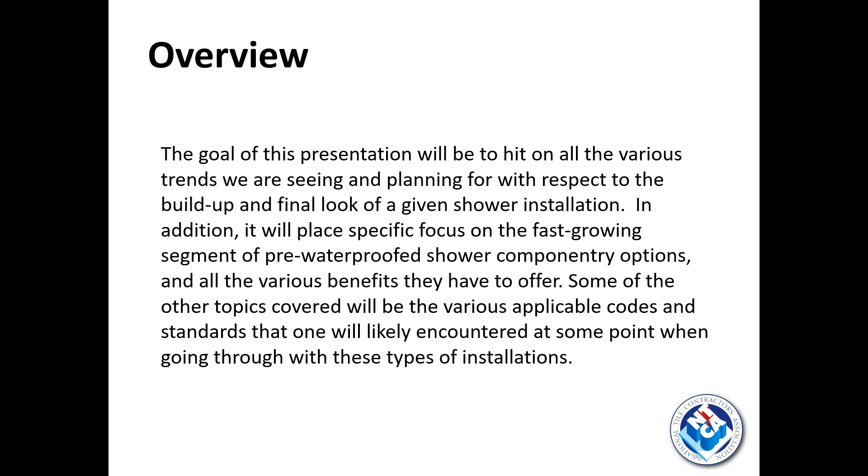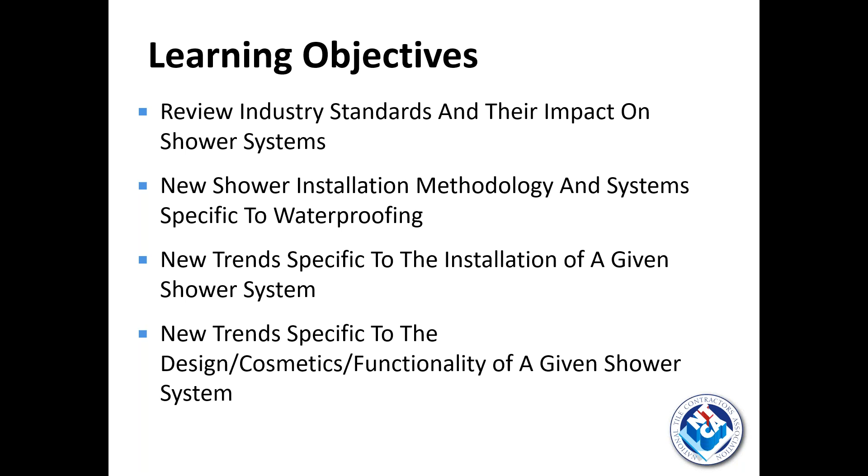So in addition to what Mr. Olson walked us through, some of the other topics I'm going to cover, in addition to the different pre-waterproofing options and some of the installation and design trends, we're going to cover the various applicable codes and standards that you will likely encounter at some point when going through these types of installations. When I think about laying out the learning objectives: a review of the industry standards and their impact on shower systems, new shower installation methodology and systems specific to waterproofing, new trends specific to the installation of a given shower system, and new trends specific to the design, cosmetics, and functionality of a given shower system. So a lot to cover. Hopefully we do it in a nice, concise way, and like I said, doors always open to hit upon any questions we get at the end of the presentation.

So when we think of tile and stone standards, the two major outfits that jump out in addition to the NTCA is the TCNA, which is the Tile Council of North America, and the ANSI, so that's American National Standard Institute.

TCNA provides a number of different installation methods for many applications, including showers and tubs. As I see it in my current seat, there are over 35 applicable different methods that fall within this arena.

The two major ANSI standards we're going to cover today are ANSI A118.10, which is a load-bearing, bonded, waterproofing membrane standard pertaining to tile and stone, and ANSI A118.12, which is a crack isolation standard for membranes as well.

A couple other codes to touch upon would be the IBC, the International Building Code, and the IPC, the International Plumbing Code.

When we get into some of the intricate different installations with regard to barrier-free showers, we're going to touch upon the ADA, the Americans with Disabilities Act, the ICC A117.1, which ties into the ADA, and the ASTM E96, which we'll touch upon when we talk about steam rooms and steam showers. It's a water vapor transmission test for perm rating.

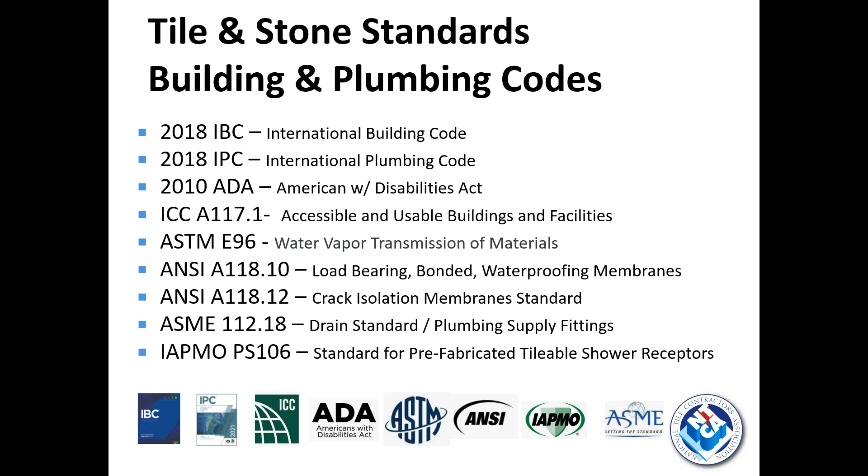Before we jump into the methods and trends in more detail, I want to provide some context around how the various methods are being digested and selected. From a product development standpoint, this involves outreach to you through surveys and on-job site interviews. I'm going to explain what we're seeing with regard to methodology selection and training.

And also the training around said methodology in this new post-COVID era. COVID-19 has impacted us in a lot of ways, right? There are social distancing guidelines, and that's really put a monkey wrench in the way we disseminated information—there was the trade show aspect, in-job interviews, live demos and training.

Now, in the beginning, before we opened up a little bit, we were hindered in that regard. A lot of the industry standards and a lot of companies and manufacturers have shifted to more online learning and training modules. As of March, roughly a third of both residential and commercial pros in a survey we took stated that their primary source of new product, method, and training came via online platforms.

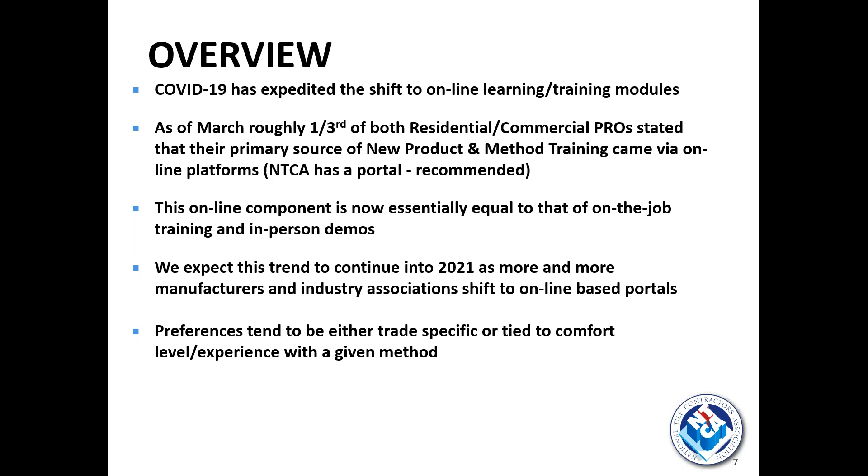Just to close that out, in addition to the NTCA portal, some manufacturers also have online learning portals as well. They are similar in nature to that of the NTCA, but they go into a little more detail with regard to the products as it's specific to that manufacturer's catalog. So it's supplemental information, but it's great information nonetheless.

Just to put a little bow around the selection and the learning process, when it comes to selection, it's very segmented. There seems to be a split between residential and commercial. There's a knowledge base that comes with it - you gravitate towards what you're familiar with. And then the third is time and cost.

Now that seems to be the one that really is the most flexible in getting somebody to specifically change from their given method of installation after they digest the information and learn about it a little bit more.

Between 25 and 33% surveyed are willing to try out a new given option based on their level of comfort after watching the video and understanding the various features and benefits associated with a given method.

When it comes to learning, we talked about the top three: on-the-job training, which is paramount, live demos, whether it be at a distributor or a job site level, and then e-learning, whether it's from an association and or a manufacturer.

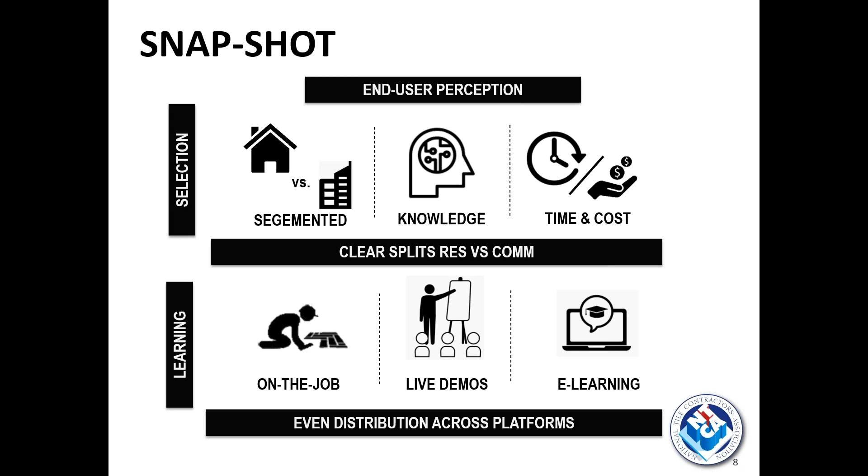Now we're going to move on to the specific installation methods and some of the installation trends that we touched upon earlier in the overview. In this section, I want to cover everything from shower types, waterproofing options for said showers, and also additional system tie-ins that are becoming more prevalent in the marketplace, whether requested by commercial entities and or end users themselves for their own personal consumption and use.

So the first one you're going to see is waterproofing. Now I chose to start off with waterproofing because when you think of it, it truly is the backbone of the support system for a given job. Without waterproofing, whatever's built up on top of it is essentially not going to get you the bang for your buck or meet the expectations that you're looking to get from said installation.

So an overview with regard to waterproofing. As of 2021, our research has shown there'll be likely a 50-50 split between traditional mud bed applications and pre-waterproof jobs. So when you think about mud beds, we're talking about that traditional installation, and pre-waterproofed, we're talking about anything from sheet to lightweight wallboard.

And I'll get into these in a little more detail as we get to the subsequent slides.

This is a trend that started a few years back, and we'll continue to skew towards the pre-waterproofed options. And we think there's a number of different reasons that I'll dive into in a little bit later that is causing that. Pre-waterproof solutions tend to be favored by the residential installation professional, but that balance is starting to shift as well.

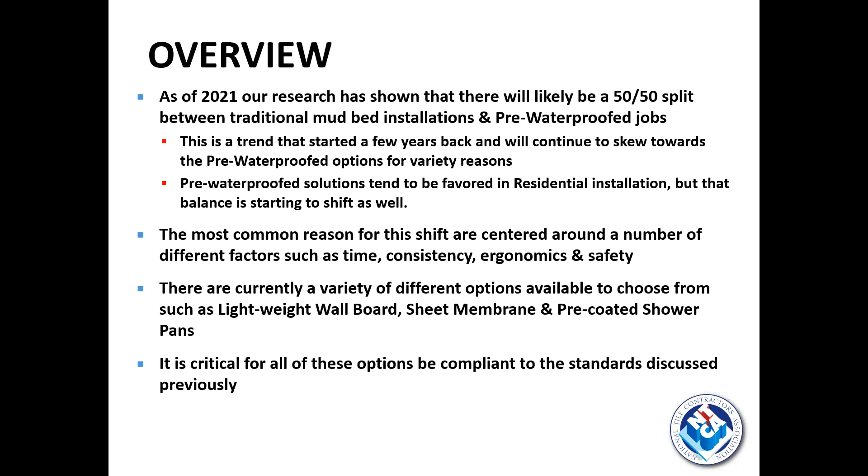So I chose, going through the TCNA handbook, the classic B415 type installation. This is a classic installation, good for large showers. It's a mud bed based application, allowing for a level of customization with regard to slope over distance. But at the same time, it can be considered bulky and thick. It has high impact in terms of stress on the body with regard to carrying materials, and also the amount of time it takes for the installation. It's tough when used with new design approaches, most notably barrier-free, which I'll touch upon a little later in the presentation.

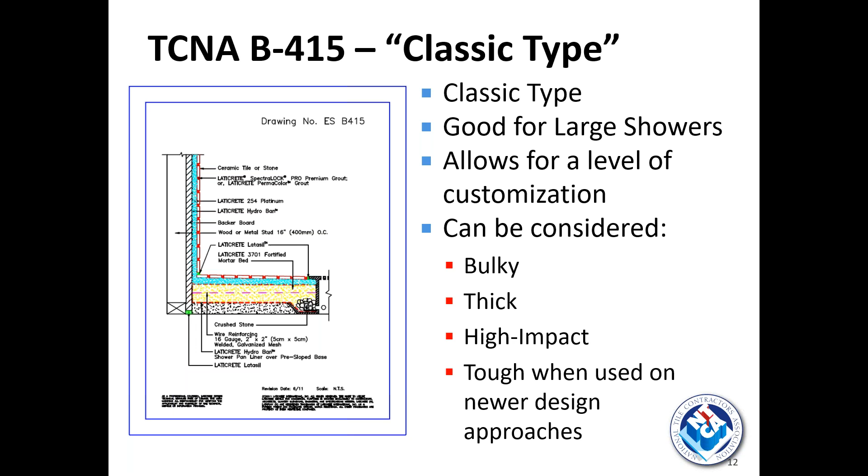Aside from mud bed applications, some of the waterproofing types I want to talk about are liquid applied, which can be both latex-based and cementitious-based. Pre-coated, pre-sloped pans, ready to slope, applied by thin set, ready to tile. Lightweight wallboard, which can be used in place of some cement backer boards. And sheet membrane, another option to be used on both the floor and wall for your waterproofing needs.

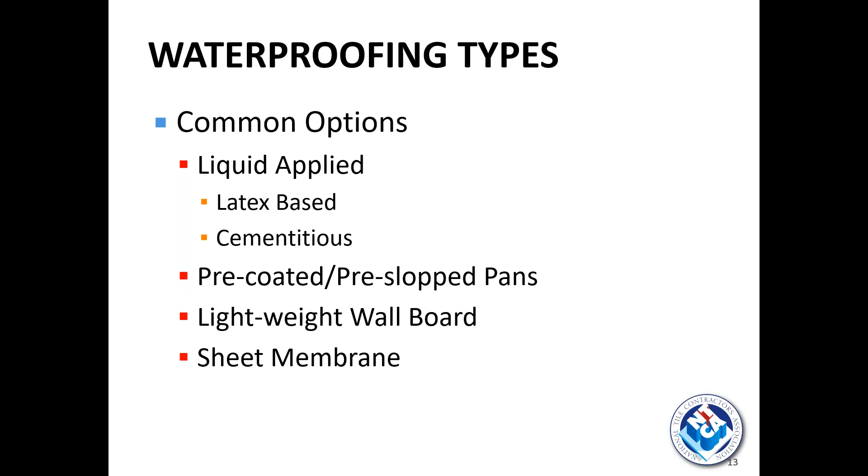When we think traditional liquid applied, some of the benefits are it's the most conventional, widely known method. It's most common on commercial sites, and in most cases falls in line with ANSI A118.10 and A118.12 compliance. Again, it's always best to check your data sheet to make sure a given material is in compliance and the testing is up to date. It's approved and recognized by a wide number of regulatory bodies, ICC, IAPMO, to name a few. It's easy to apply, there's no fabric required. There's a number of different ways to apply it: brush, roller, spray. It provides additional protection the more coatings you put on.

And then installation challenges: there is a bit of a time element and a margin of error in that two coats are needed. While it does provide that extra layer of protection, there is a time-based nature to it, as you have to wait for it to cure and then add the second layer.

Some other features and benefits are it changes color when cured, so there's a level of security. And now, based on the post-COVID world we live in, you'll start to see the touting of antimicrobial technologies that some manufacturers are adding into their product to give that extra peace of mind, both during the installation process and after.

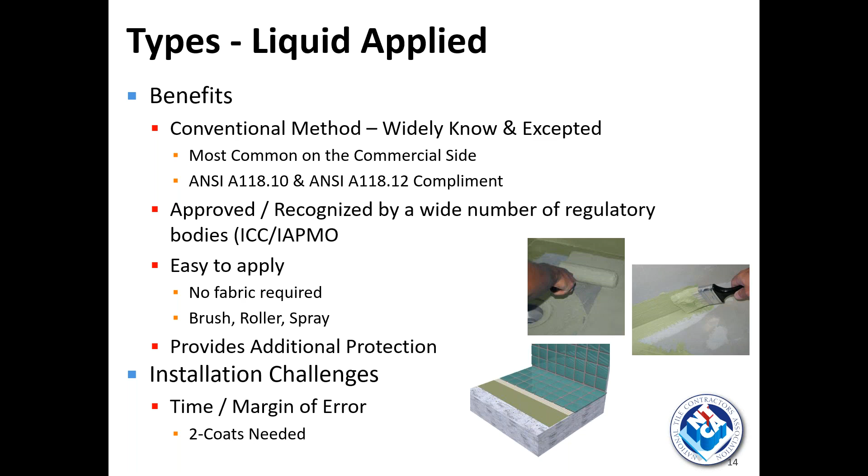Next, we're going to talk about preslope, prewaterproof, ready-to-tile, integrated drain pans. These are prefabricated pans that come with the drain in, tile ready. So thin set down, thin set on top, tile.

The benefits are, from an ergonomic standpoint, they're lightweight and easy to transport depending on the size. Productivity-wise, the drain is already installed, so it minimizes the potential for mishaps. You're going to get consistent results based on the quality of the product from a given manufacturer.

They are ADA compliant—most are ADA compliant. You have to check your data sheet to make sure they are in accordance with the slope, the per square foot, per linear foot regulations. They are site sizable and allow for some level of customization, so if you get to a job site and have to make additional cuts, they are easily site sizable.

Some of the challenges, however, are around the transition from the mud bed. If you've used or gone through mud bed installations in the past, there might be a little bit of a learning curve. But being the pros that you are, I don't think that would necessarily be the case when zeroing in on one of these types of installations.

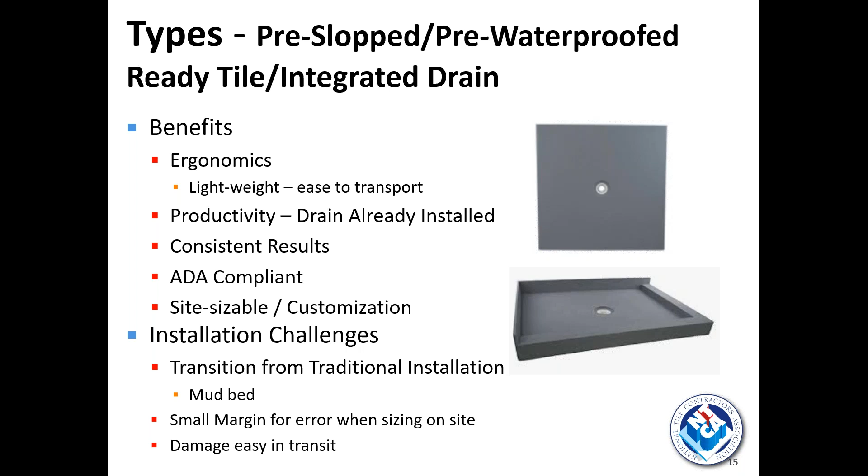Next, we'll talk about preslope, prewaterproof, ready to tile. Not necessarily integrated drain, but some of the same great features and benefits: lightweight, easy to transport, consistent results, ADA compliant, site sizable, same type situation.

Some manufacturers—and this is where we're seeing a lot of the trends go with regard to installation—offer customization. To have the ability to fit one of these to site is a nice thing in terms of that productivity aspect of the build, cutting down on time and labor.

You cut down on the abuse the body takes. It makes for a nice, concise, safe install.

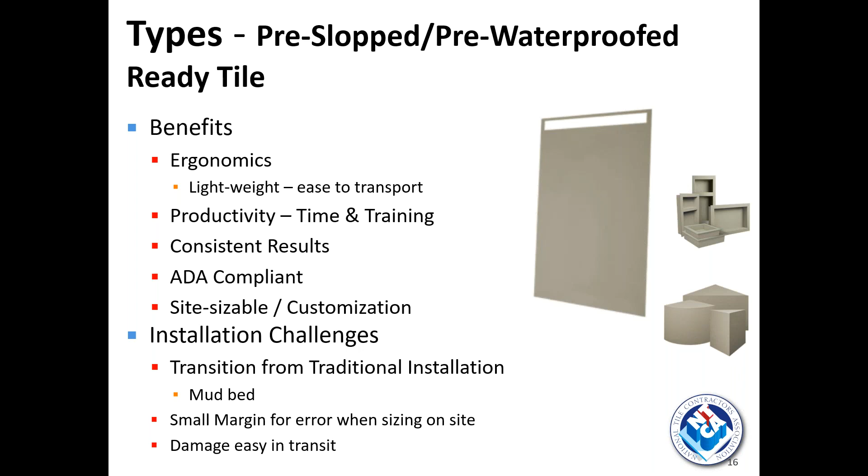When using one of these pans, you're also going to need to waterproof the wall. To tie in that ergonomic story, companies are starting to create and offer lightweight wallboard in various different sizes and configurations. Aside from being lightweight, it's also very modular, site sizable, and provides a consistent surface.

A lot of these are now steam room and steam shower rated, with a relatively low learning curve. It's affixed directly to the stud, and then it's ready to tile after some level of treating seams and penetrations.

It's really becoming popular in both the residential and commercial segments of the business—one of the fastest growing subsets we're seeing based on customer reaction to it.

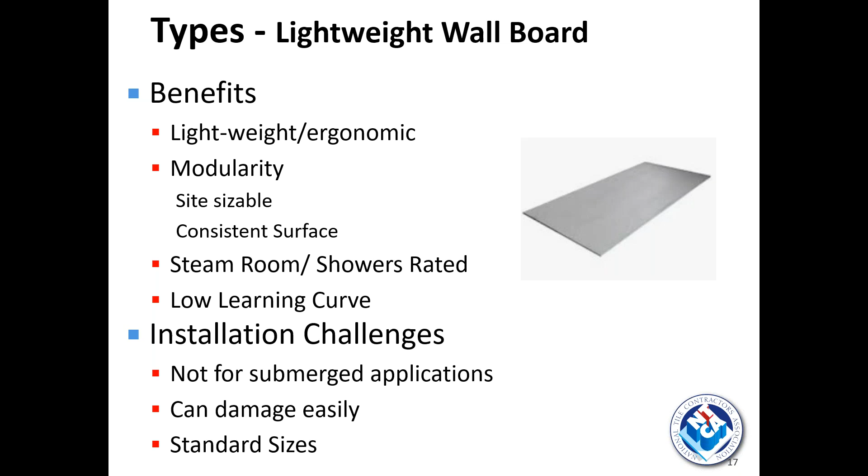Some of the challenges: they're not all suitable for submerged applications at this point, so there is potential for some innovation there. They can damage easily, and there are standard sizes, so there is some level of customization needed depending on the intricate nature of a given shower or bathroom.

Last but not least is sheet membrane. Again, some of the same features and benefits: lightweight, ergonomic.

The installation challenges include placement in tight spaces. Because there is a level of thin set needed to apply these to a given backer board, there is a little more time taken for removal of the excess. There's also potential for buildup along seams and corners, which carries a moderate learning curve. Once you're versed on it, you can see the true productivity benefit with regard to time, but there is a learning curve to get fully versed and really fly through one.

In some cases, this sheet membrane does come pre-applied to either the wall boards or the pan. Check a given manufacturer's data sheets and installation instructions to understand what level the sheet membrane you're looking into is going to come, whether it's pre-applied to said wall board or pan, or if it has to be manually applied to said pan.

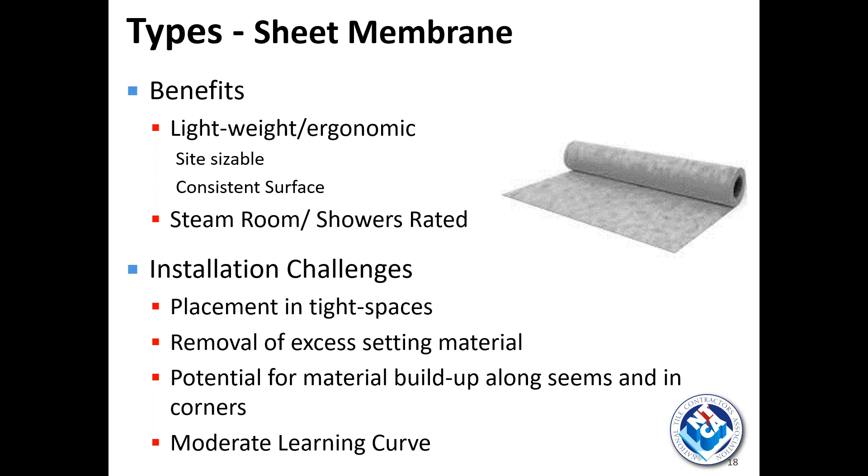So we've talked about some of the waterproofing options. Now we'll talk about some of the installation trends that we're seeing, and barrier-free is first up to bat. Going through the current TCNA handbook, we took B421 and B422, that's the C method, the method with use of a bonding flange and/or a linear drain. These are good for barrier-free installations.

Now, when I say barrier-free, that is an obstruction-less shower, and I'll touch upon that in the next slide. So why is this good for barrier-free? It connects the waterproofing membrane and the drain at the surface, minimizing buildup. That reduces the additional modification to the floor height to remain compliant with ADA guidelines when it comes to slope per square foot.

One thing to note on these, when dealing with that type of membrane that is not mud bed specific, waterproofing must be carried to the height of the tiled assembly on the wall, and that's just to guarantee the consistent flow of water and no buildup behind said installation.

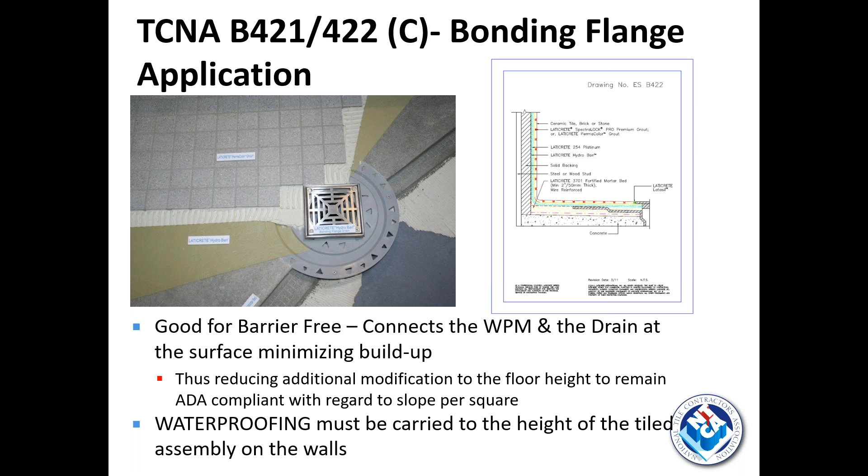So, why barrier-free? Are you choosing it because it's compliance related? Are you choosing it because it's on trend? These are some of the things you'll know going into the job, but they do come in both ways. There's some level of compliance when it comes to barrier-free installations due to the ADA, in that a certain given number of showers must be barrier-free in a specific build. And then there's a level of, hey, it really looks nice.

Cosmetically, this is where the end user wants to see, this is how they'd like to see their bathroom. They allow for easier access and security with regard to getting in and out, minimizing slips and falls. Clean sight lines from a cosmetics perspective. Space maximization, so really with reducing the sight lines, it makes the bathroom look a little bit bigger to the naked eye, and thus more appeal with regard to resale on a given property or home from a residential standpoint. They're on trend, and there's less maintenance, less buildup, less cleaning. It's definitely become more and more requested by both end users and builders.

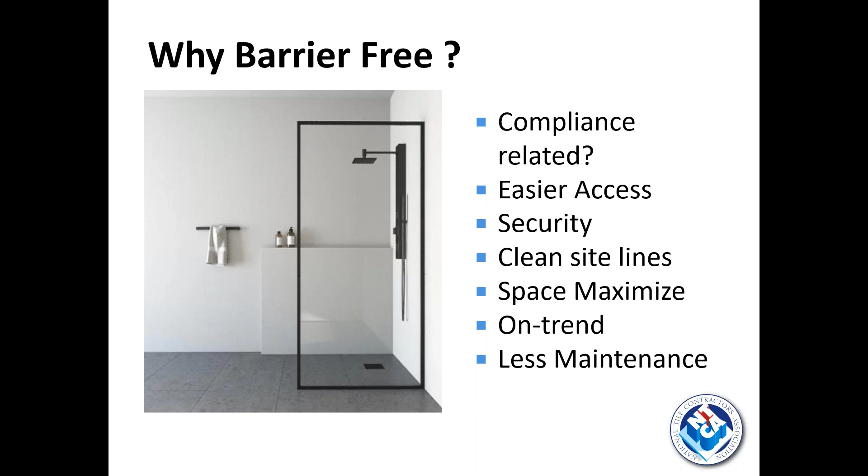So when making that distinction to go barrier-free, the first thing up to bat is really defining the space, right? Is it purely aesthetic, or is it for purposes mandated by ADA compliance? You want to first define the receptor area. It's not always clear what the receptor area is. You want to make sure if it's the entire room or just the area contained to the shower, and that's something that's going to come from the architect. That's really what's going to drive whether or not you need that second drain to capture the overflow.

With regard to the walls, there are different environmental classes you're going to need to take into account, and that's really going to determine the level of waterproofing. Those can be found in the TCNA handbook under the environmental exposure classifications, which outlines in detail what level of water exposure you're going to be faced with in the build. That's what's going to lead you into the amount of waterproofing you're going to need on said walls.

So we focus on COM 2, 3, and 4, which are limited water exposure, so not soaked or saturated would be a COM 2. Wet, which with regard to shower walls would be more of a COM 3. And then COM 4 would tie to high humidity, high moisture, so steam and shower rooms.

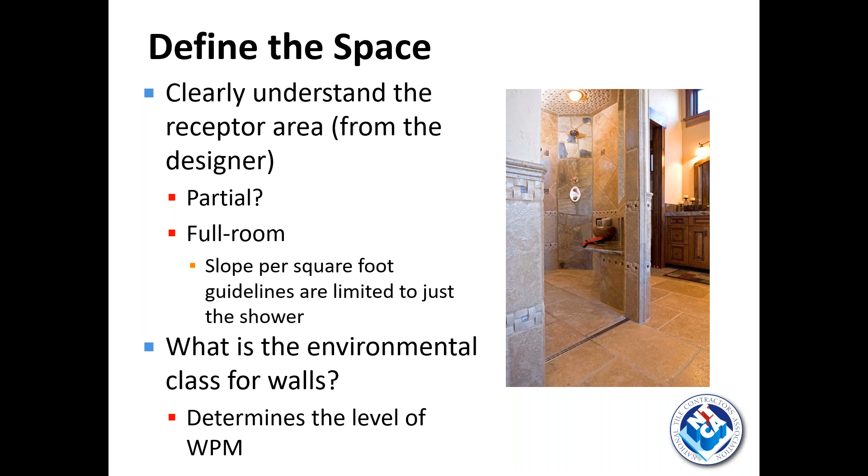So I chose this barrier-free cross-section. This is one of the spec sheets that we provide. I know a bunch of different manufacturers provide said spec sheets or installation instructions for given installations. The industry is working on creating additional details and standards for these applications, but we really focus on the two details we talked about, that 421 and 422.

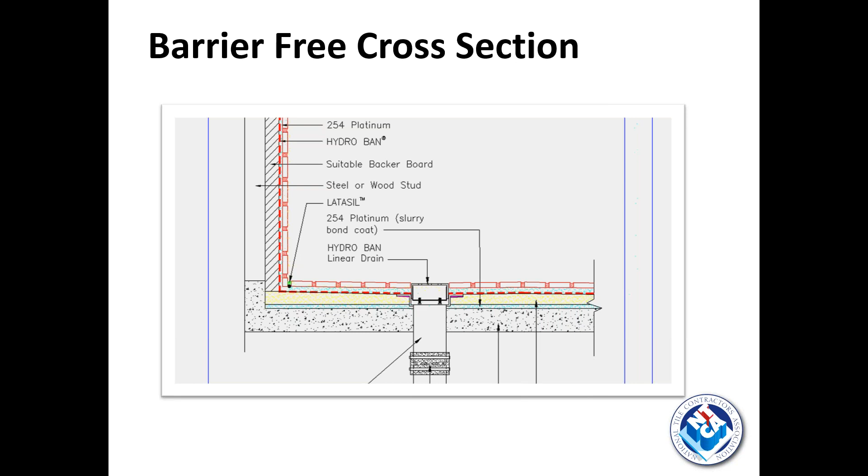Some of the challenges around barrier-free installation is there could be challenging obstacles on the wall, undulations and whatnot, and that's what's going to determine whether or not you need that second drain.

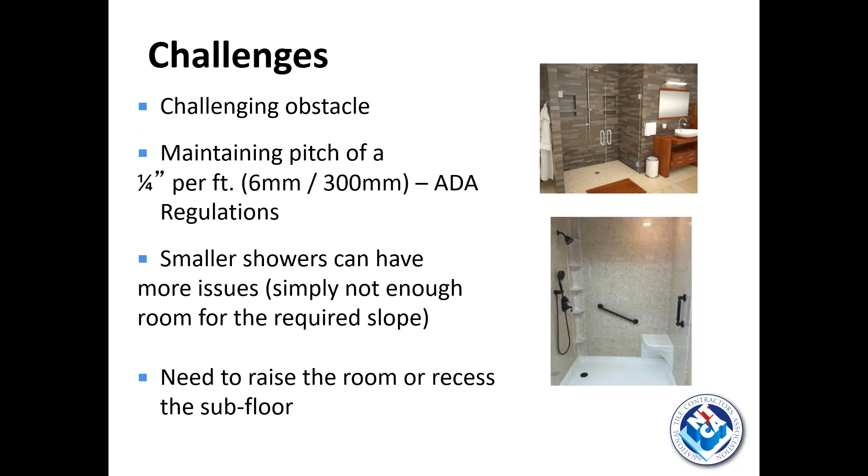There's a level of maintaining pitch, so it's a 1/4 inch per linear foot per the ADA regulations. Smaller showers can have more issues, so there's simply not enough room to meet the required slope, or there's the need to raise or recess the subfloor to be in compliance.

How that ties in with ADA: you can have no more than a 1/2 inch rise coming into the room, which ties back to the 1/4 inch per linear foot for the slope. Typically, a minimum of 36 by 36 for a front entry is the size you're going to see, and that's to account for the radius of a wheelchair being able to turn. That differs from a side entry shower, which would be 32. Traditionally, a good example would be 32 by 60.

What I can tell you is many of the preformed or pre-slope pans in the marketplace account for this in the sizing they offer. This is already taken into account, so it almost foolproofs that portion of compliance for you.

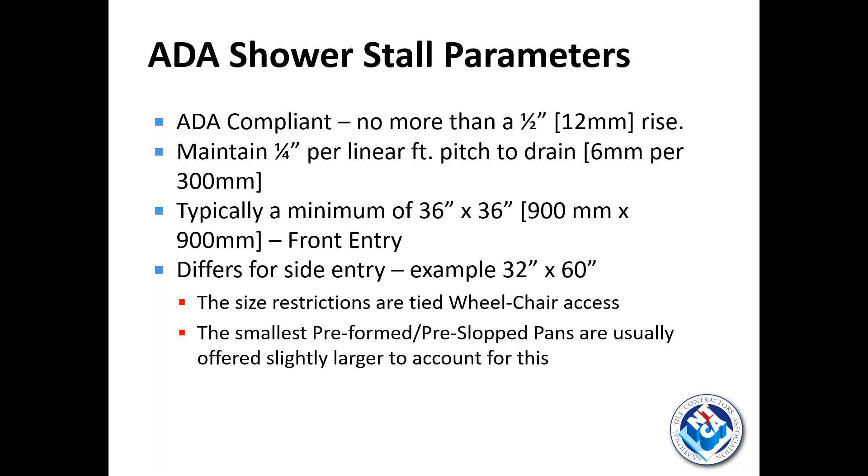Once you have the shower in and ready to go, there is a level of flood testing required. Now, there is no formal industry standard - manufacturers and/or installers are at liberty of designing, developing, and verifying your own. I've provided a link for one of our examples so you can get a sense of how we write it out. It provides a method overview, and then gives you the timing - you circle back to your data sheet for the given installation, and that's what determines how quickly you can get in and flood test. There is some variance between the liquid applied, the sheet, and the different wallboard options that are offered right now.

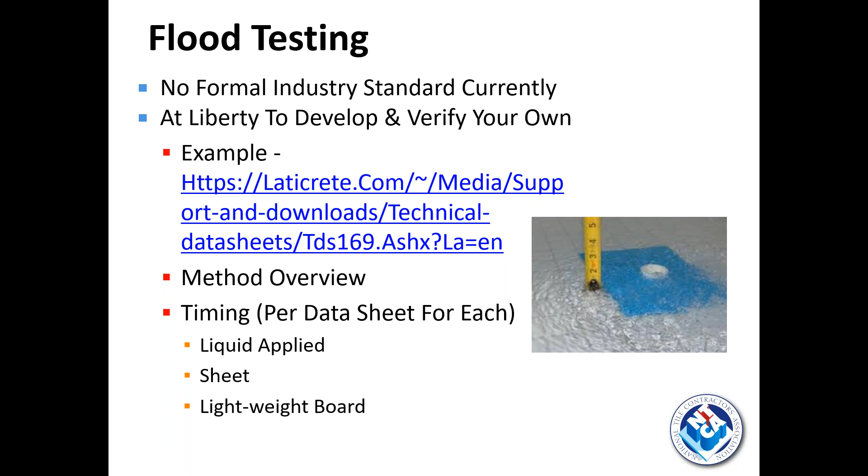So we just talked about barrier-free as one of the different installation options being asked for from both an installation and a cosmetic standpoint. The next is going to be floor heat. When you think about floor heat, it's exactly what it sounds like - integrated floor heating systems. And they're starting to move into the shower portion of a bathroom install. This is no longer just the bathroom floor - people are requesting these in their showers. It can be looked upon as both a primary and a secondary source of heat for a given room.

Only floor-based installations are considered to be compliant with electrical code, so again, consult your data sheet to make sure they are in accordance with said code.

From an end user standpoint, research has shown that as part of a master bathroom remodel, it can help enhance the overall resale value of your home when you're looking at just the master bathroom part. And that's along with other popular trends such as open concept showers, freestanding tubs, stone and large tile countertops, and separate enclosed spaces for the toilet.

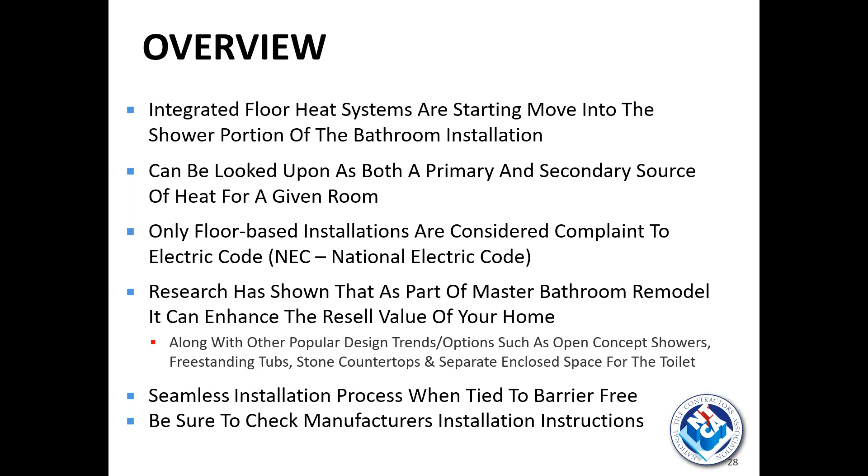There is a seamless installation process when you tie this to barrier-free. When you marry up those two trends, it makes it a little bit easier with regard to the installation. And as always, be sure to check manufacturer's installation instructions for more details before undertaking such an installation.

So when you've made the decision to switch to floor heat, what are the different system components you're going to be looking for? Mats and wiring are the first, essentially, just like waterproofing - the mats and the wiring are the backbone of a given heat installation.

There are fully integrated peel and stick mats, so the wire and the adhesive already come in a roll. Then there's the manually applied wire membrane - we tend to see that as being the more popular of the three systems I'm going to talk about - and the last being the heat strips, which are affixed directly to a given substrate. The wire mat provides a little bit more customization when you're manually applying the wire to the mat.

There are levels of compliance with UL. So again, check your data sheet, check your installation instructions, as there are only a few UL approved installation methods with regard to wire spacing per square foot when it comes to floor heat.

When you think about thermostats, there's just the basic set my temperature and walk away. There are fully programmable, which you can set to timers. You can learn your habits. And then there's some level of smart, right?

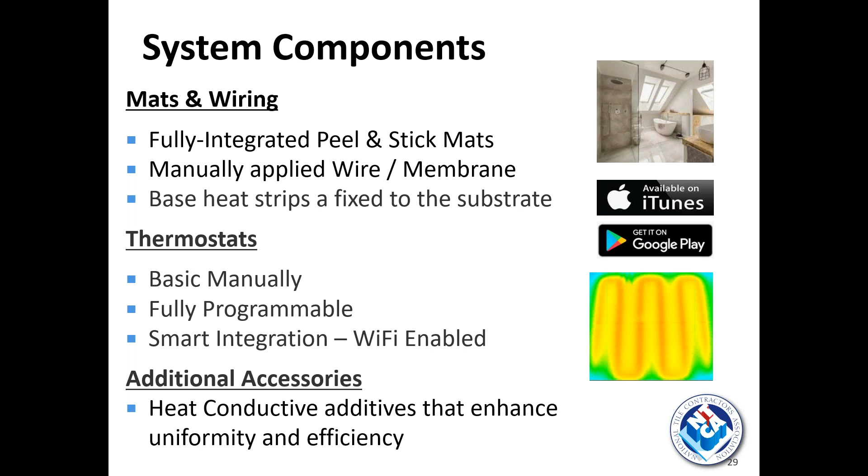Now that we've talked about some of these installation trends, the system installation trends, we'll talk about some design trends.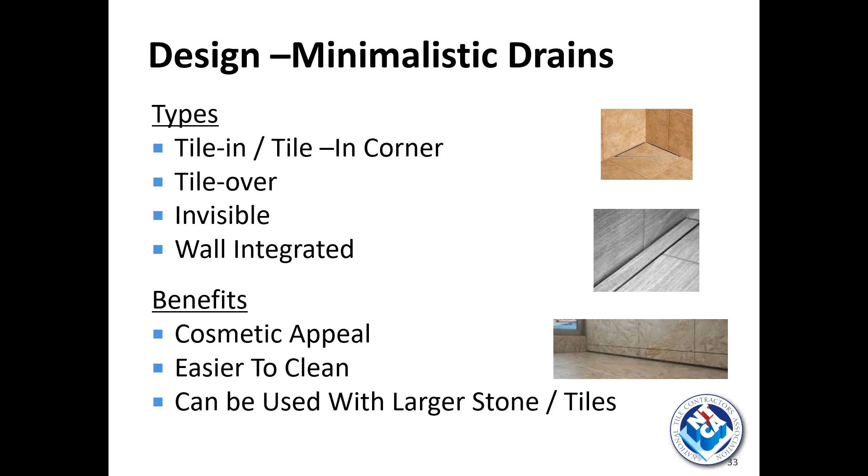I know I touched upon open showers a little bit earlier. Open has really transitioned throughout the whole bathroom, so that's fully sloped, fully waterproofed, enclosed spaces that are all encompassing, whether it be a freestanding tub, multiple drains and jets. They, by definition, are barrier-free.

And that's really where we would circle back to that define your space portion of the barrier-free installation, and really getting to understand the amount of water flow and the amount of volume that's going to be going through said bathroom to really determine what level of drainage you're going to need.

And then if you're going to transition them to steam rated or potential sauna enclosure, you have to know that ASTM E96 are the permeance ratings of a given membrane to know if it's rated for steam showers. It's really knowing the exposure class as well, and that ties back to the secondary drain selection and the waterproofing with regard to the walls and the ceiling. Specific to steam showers and steam rooms, you're going to want to waterproof the entire enclosure.

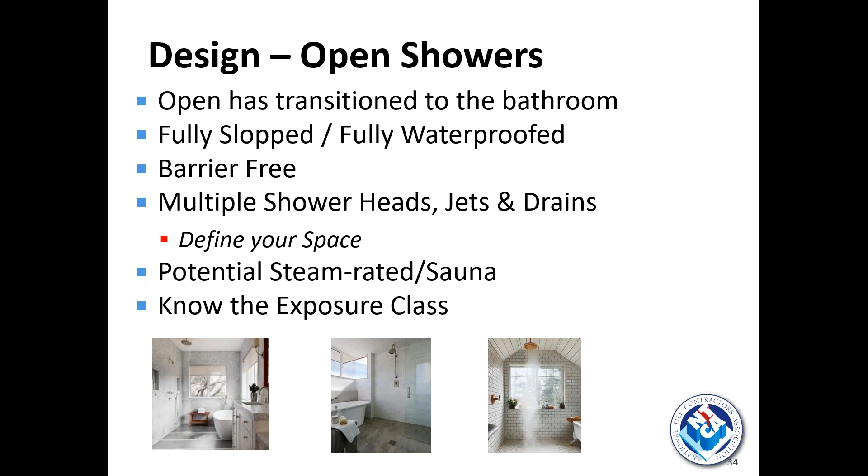Steam rooms, like we just talked about, they are trending due to the perceived health benefits. Some of the health benefits when you think about steam showers - they help relieve stress, relax muscles, soothe aches and pains in joints, remove toxins, cleanse the skin. So basically health and well-being is a near sister feature and benefit to the ergonomics, really preserving that quality of life.

Steam showers are starting to become more popular as we take into effect the COVID-19 effect, if you will. As people are spending more and more time in the home, they're realizing either deficiencies they have with their current space or improvements they want to make moving forward to enhance their standard of living within the space and/or the resale value should they look to leave said space.

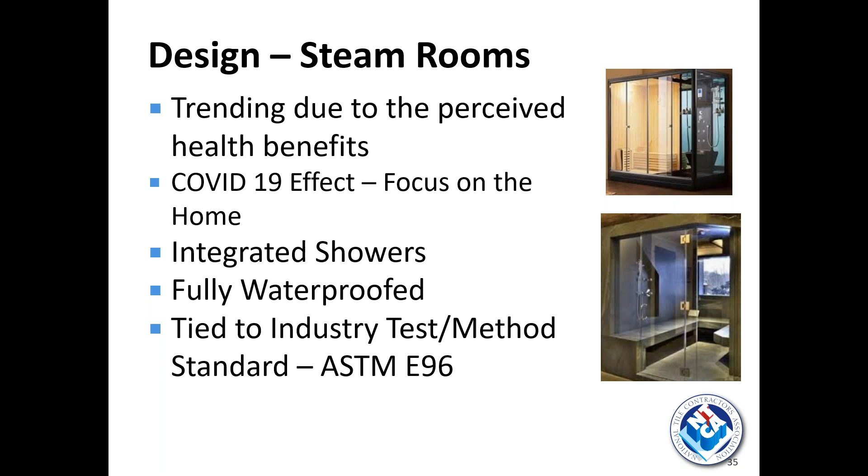Steam rooms have integrated showers. Like we said, they are fully waterproofed from ceiling to floor, and they are tied to the industry test method/standard of ASTM E96, which is in regard to the perm rating of a given waterproofing solution. So when we think about low perm or waterproofing for a steam shower, always make sure that you're in accordance with ANSI A118.10, which is the standard for load-bearing waterproof membranes.

ASTM E96 method E is essentially the method specific to steam showers with regard to the temperature thresholds given to that method of testing. Less than 0.5 perms is what you're looking for to be considered steam shower rated. If you tie that back to the TCNA handbook, you'd be looking at installation method SR613 and SR614. And as a general rule of thumb, it's always good to check with the manufacturer of a given membrane to get their perm rating off the data sheet to make sure it's in accordance with the testing standard we just talked about.

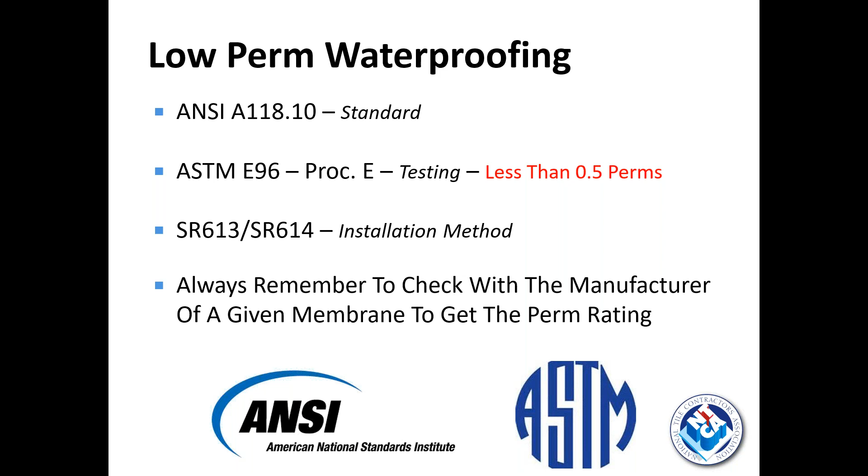When it comes to tiles, we're seeing thinner tile/mosaics really becoming popular with end users and also installers. It allows for graphical patterns, which ties back to the customization aspect that we talked about. They feature matte finishes, style-driven, less perceived maintenance, neutral colors which are perceived as timeless, and there's resale appeal because you feel that bathroom is move-in ready on a more consistent basis than somebody who wants to make changes.

Dimensional and subway tiles offer vast customization and color options, and then larger tiles overall, 48 plus, are replacing stone in some cases.

From a shower systems perspective, manufacturers are developing products such as pans, flanges, and grates that are designed to work in accordance with these types of tiles to make the installation process easy, eliminating the extra legwork that it would take to marry up the install.

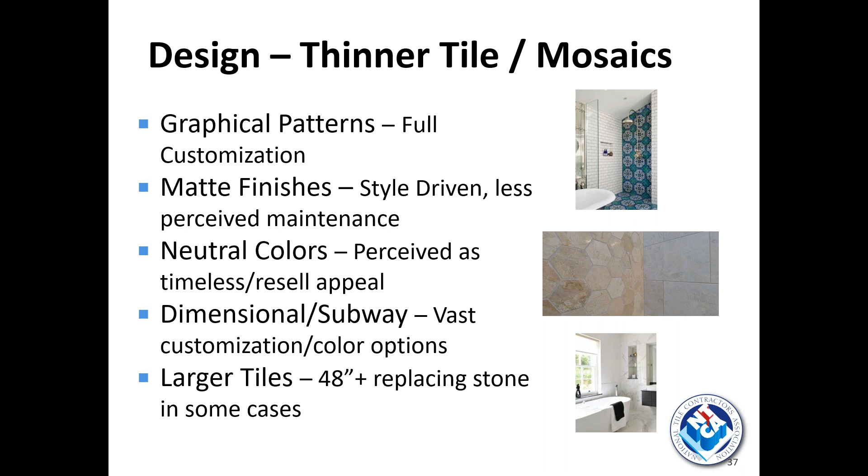The last one I'm going to touch upon from a design standpoint is a transition to marble, concrete, and terrazzo. All three materials are starting to funnel their way into the bathroom. The concrete provides that industrial vintage effect. Marble is just a transition and commonality between the kitchen and many open floor plans. And then terrazzo is truly customizable and perceived as low maintenance with regard to cleaning and upkeep.

So I hope that was a nice concise overview with regard to some of the design trends that we're seeing, and I know companies and manufacturers like us are designing around and designing in accordance with, as we look to provide the most comprehensive solutions to our both installers and also end users alike.

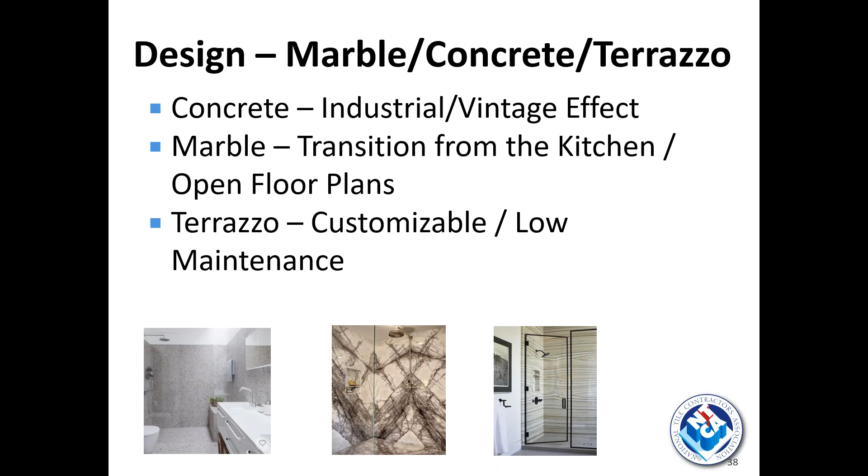I'm gonna close out the last section, really focused on just general tips that we can talk through that we see when going out on job sites, just recommendations that we can make at a very high level to help, fact checking, or really just allowing for a level of preparation to be ready for a given installation. So membrane termination points, by rule of thumb, we say waterproof as much as you can, right?

When it comes to wall heights, that'd be really determined by the buildup, so determined by the waterproofing method. If it's that traditional mud bed, you have a little bit more liberty on how high up on the wall you want to go. But if you are using one of those pre-waterproofed solutions, there is a level of height that you're going to need to look at with regard to that installation, and that really essentially is up to the shower head almost itself.

And then when it comes to the floor, obviously it makes sense to, and we're in the business of it, waterproof the entire bathroom, but it really is just recognizing the drainage and understanding the slope of a given floor with regard to where you're going to want to waterproof to make sure you're encompassing all of the potential overflow that could come with a given bathroom.

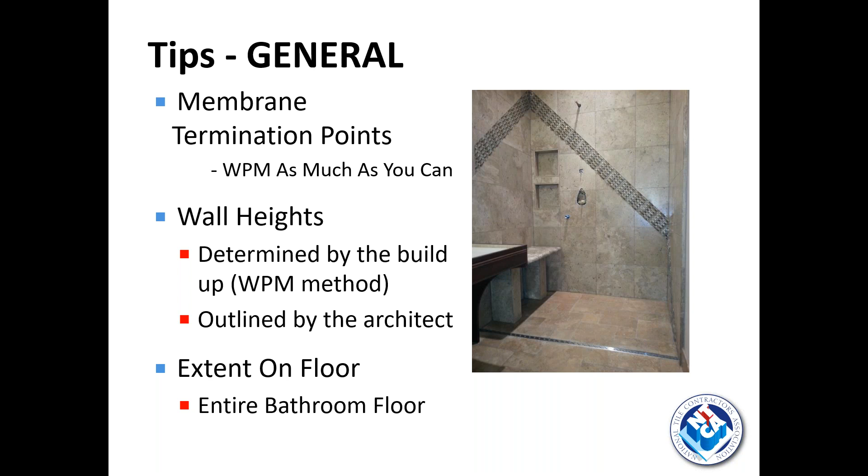When it comes to barrier free, use a bonding flange and or a linear drain that's best suited for surface waterproofing, meaning that you're eliminating the buildup. We touched upon that in B421 and B421C and 22 and 22C.

Use a high quality waterproofing membrane. I'm not going to make any plugs, but I'm sure you guys all have your go-to with regard to the method of waterproofing. Keep it low, the lower the buildup, the less legwork you're going to have to do. And remember to flood test, right? That's optimal when it comes to the overall quality installation, and then the potential for follow-up work that might necessarily need to be done in the future.

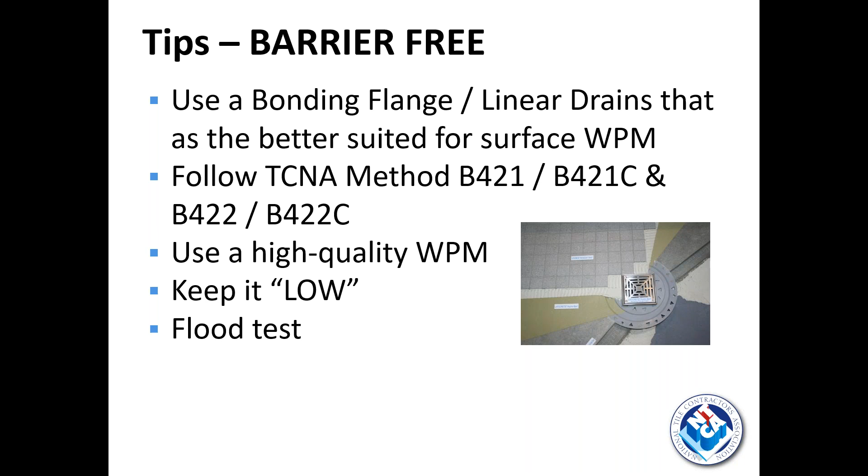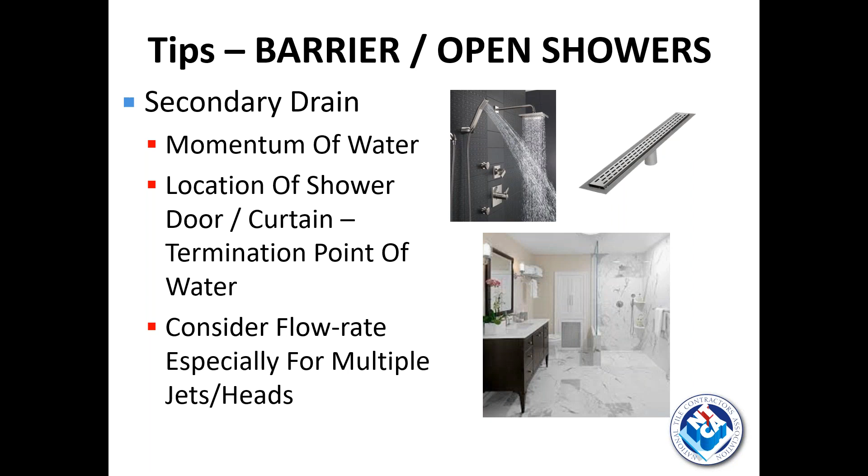From an installation standpoint, know all of your options, right, regarding the available installation materials. I know we covered a bunch of different options that are available to you. Really get a sense of what you think works best for said job, or what you think works best for said level of labor skill that you would have on a said job.

And then know that there are customizable options, right? Everything doesn't have to be that cookie cutter approach. There are different things you can do with regard to pan sizes, drain sizes, finishes. So there are companies out there offering up a number of different customizable options in all of these different arenas to make each job as unique as the end user or the customer might want it.

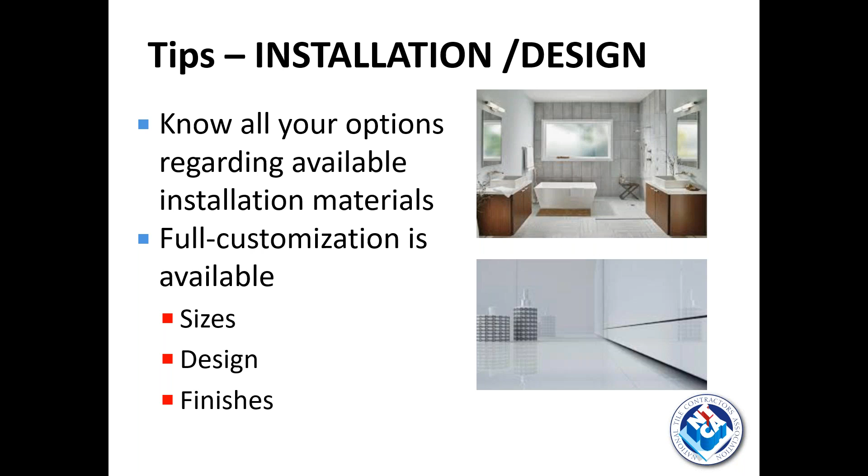Last but not least, when it comes to labor and training, use certified labor. This really is a joint industry effort between NTCA, TCAA, CTEF, and all of the various industry partners and manufacturers. And from a training standpoint, it's out there, right? The material is out there to be digested, whether it's from the specific associations and or the manufacturers.

We are providing that content. We want you to interact with us with regard to that content, digest it, ask questions. The more it can be a free-flowing conversation, the better it's going to be in terms of the products we produce and also the focus that we have on some of the pain points that you guys are seeing out in the field.

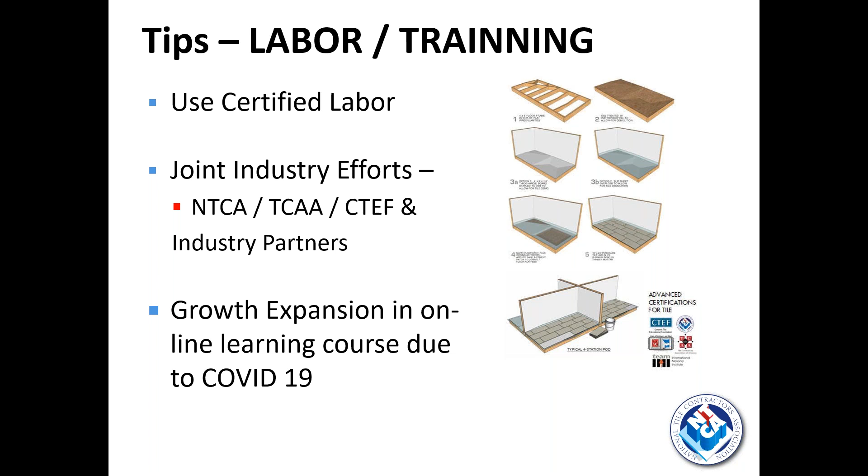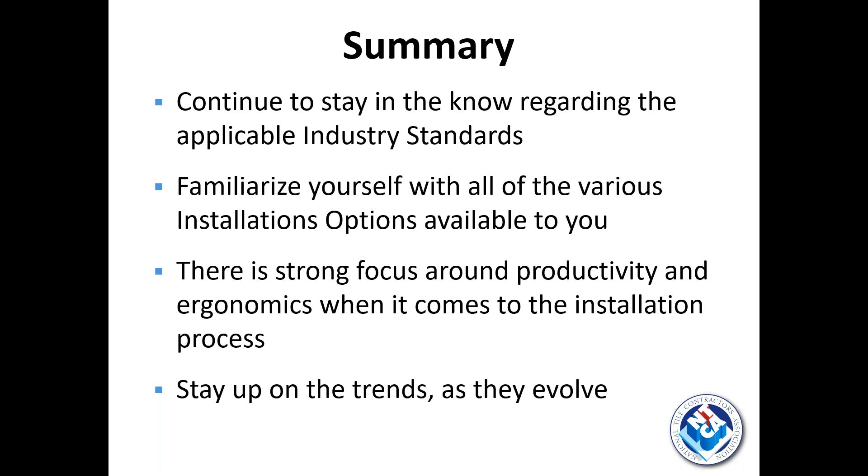So as I put a bow on the presentation as a whole, in summary: continue to stay in the know regarding the applicable industry standards. Familiarize yourself with all the various installation options available and all the different trends. Stay up on the trends as they evolve, and just know that there's a strong focus around productivity and ergonomics when it comes to the installation process. At the end of the day, we have the health of the installers in mind with regard to any innovation around a given product line.